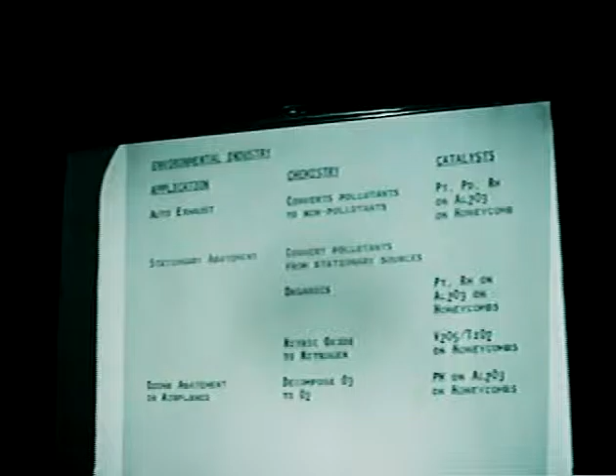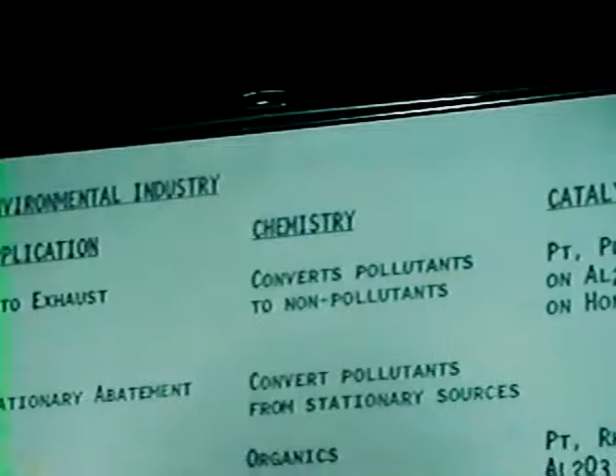And now, as was announced, we're very actively looking at the control of emissions from diesel engines. So what I'd like to do tonight is give you an overview of some of the existing technologies that are currently in practice for environmental control involving catalysts. As I mentioned, the auto exhaust is certainly the most predominant. We'll talk a little bit about the basic technology - basically it involves precious metal catalysts, and they're pretty much supported on honeycombs, these monolithic structures, which I'll show you some pictures of soon.

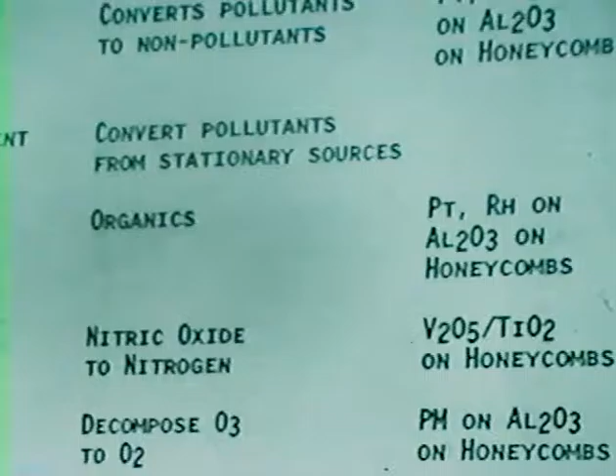One of the descendants of the automobile catalytic converter is the so-called stationary abatement. Here we're talking about catalytic devices that are used for controlling emissions from a variety of stationary sources - chemical plants, where they might be painting a particular car body in an automotive application, or coating wire, or a power plant where you have CO and hydrocarbon emissions, or, which is now becoming very critical, NOx emissions. NOx is one of the major pollutants that emanate from power plants, and therefore there's a lot of technology that's directed towards trying to make the catalytic abatement much more cost effective.

Platinum-based catalysts were used for the stationary organic oxidations, whereas for the reduction of the nitric oxides, effectively it's vanadium titanium, although some new catalysts are being introduced now - zeolite catalysts for higher temperature application. And then finally, there's another interesting one that we'll talk about briefly, ozone abatement in airplanes, related to the air that enters high-flying aircraft and how it needs to be purified. So these are some of the existing technologies, and then we'll get into talking about some of the things that are on the horizon, some new types of technology, all of which involve catalysis, all of which still have problems that need to be solved.

Let's talk briefly about the automobile catalytic converter. The normal combustion reactions that occur in the internal combustion engine are things like the combustion of benzene or branched hydrocarbons, and the complete combustion of these organic materials lead to, in addition to CO2 and water, energy - and that energy is the useful part that is used in the power stroke for the internal combustion engine.

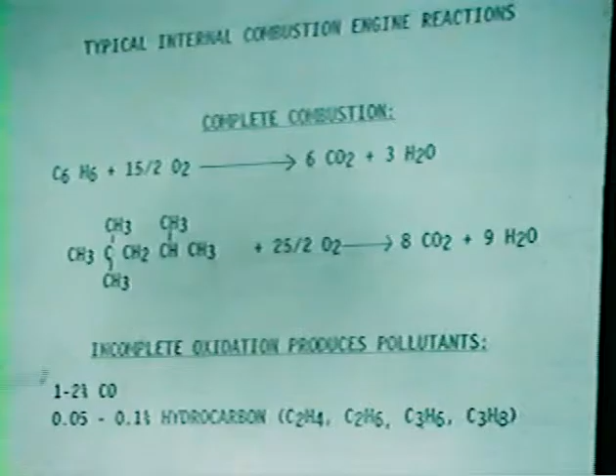These reactions, as they're written here, are shown to be complete. But in reality, due to mixing, due to lack of efficiency, etc., there are situations where the combustion process is less than efficient, and it results in significant quantities of things like carbon monoxide - anywhere from 1 to 2% of the emission is carbon monoxide.

Also, because of cracking reactions and other things that occur, you can get hydrocarbon concentrations up to about 0.1%, or about 1,000 ppm. And these are typically the hydrocarbons that are involved.

On the other hand, due to the high temperatures in the internal combustion engine, you get nitrogen fixation reactions where the nitrogen and oxygen react homogeneously and produce NOx. NOx is the symbol usually used for NO, NO2, N2O, and generally it's anywhere from about 100 to 300 parts per million of NOx in the emissions.

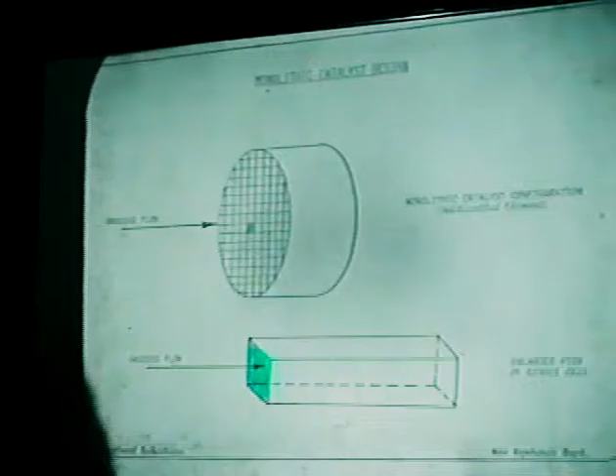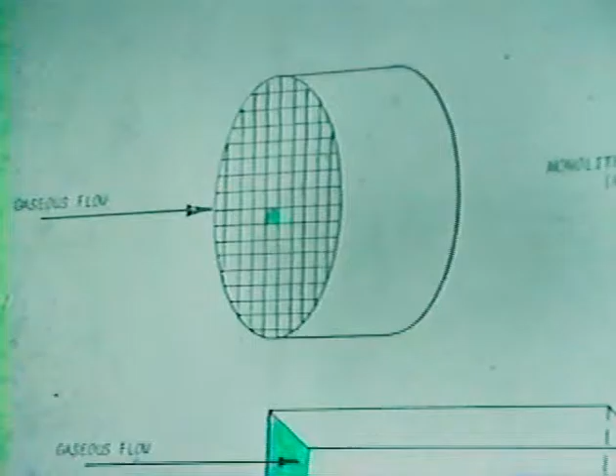The history is very interesting as to what technologies were ultimately used, and I don't have time to get into why General Motors went one way and Ford and Chrysler went another way, but basically most of the world right now is moving towards monolithic honeycomb structures that are effectively ceramic in nature, although there are some metal substrates that are now becoming of interest.

But these materials have a variety of cells, and usually 400 cells per square inch is typically what is used in current automobile catalysts. The ceramic material is simply used as a support or structure upon which the catalyst coating is deposited on the walls of the channel. The pollutants emanate from the internal combustion engine, pass through the honeycomb, interact with the catalysts, and the catalysis reactions occur.

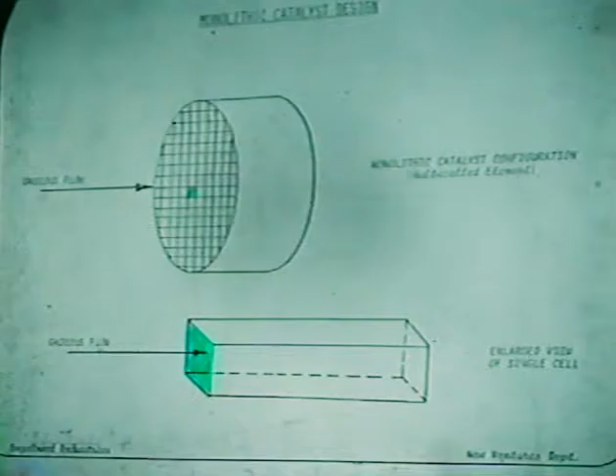The honeycomb or monolithic structure is particularly popular because it has very low pressure drop. It has about a 70% open frontal area, which means very low back pressure, which translates to a low fuel penalty. Also, because you can pack a lot of cells per square inch into this device, you can have a very high surface area with relatively small volume, so from a real estate point of view it fits in nicely underneath the automobile.

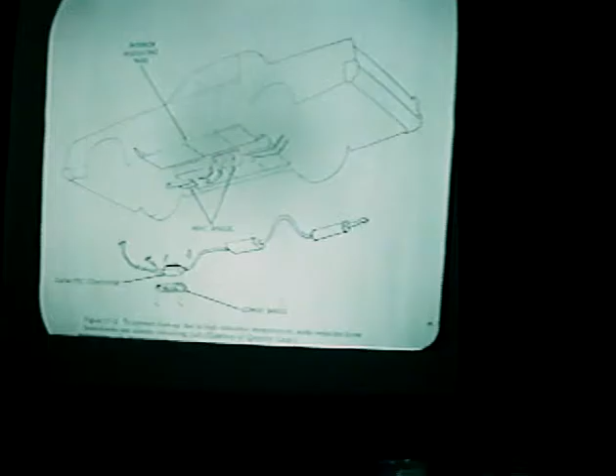Now that, if we take any one channel of that—oh, by the way, let me show you where the catalytic converter fits into the automobile in case you don't know already. In this particular shot we have it before the muffler, but the catalytic converter is right underneath, usually the passenger seat. The gases are connected to the engine manifold, and the gases pass through.

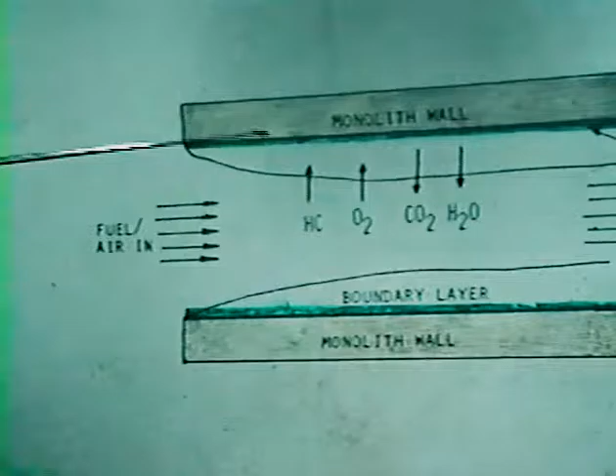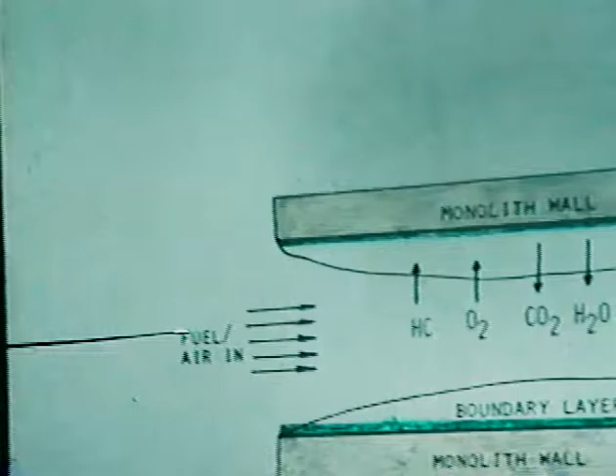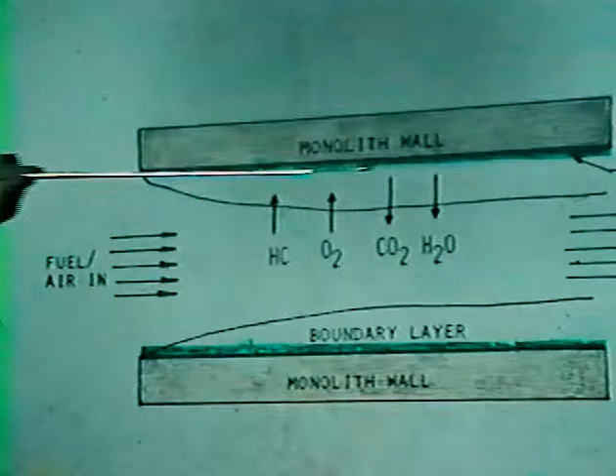This is a single channel of a honeycomb, and the catalyst coating is deposited onto the walls of this monolithic material. The catalyst is deposited on the wall, and the pollutants, fuel or air, etc., pass through this channel, of which there are at least 400 per square inch, as I indicated earlier. These pollutants diffuse through this stagnant layer into the catalyst coating, get combusted to CO2 and water, and then exit the actual tailpipe.

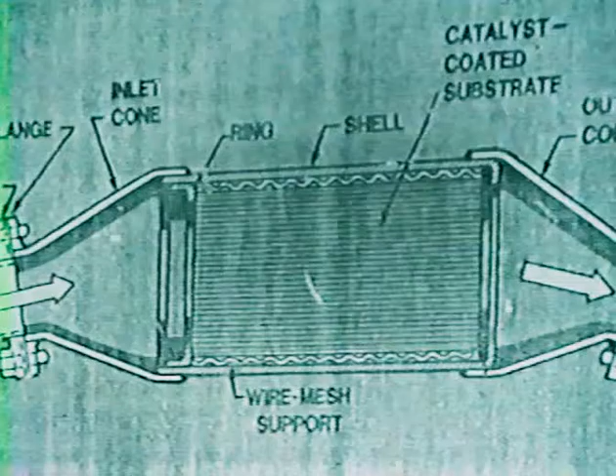The monolithic converter is mounted or packaged in the exhaust manifold. As you can see, you have to have the right angles in order to present uniformly to the face of the honeycomb the pollutants and air mixture. The material here is used for both insulation as well as for shock, because the material very often will bounce over highways and roads, and to keep it from fracturing you have to have the proper type of insulation. If it's not canned properly, these things can break very easily.

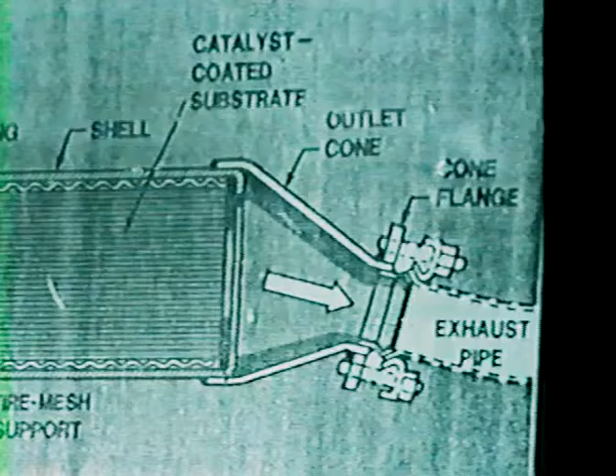As I'll mention later on, the newest automobile catalytic converters have another device right here at the inlet to the honeycomb, called an oxygen sensor, which is used to control the air-to-fuel ratio.

Okay, let's talk about the catalysis a little bit. In 1976, when the first catalytic converters were actually installed in the United States, the only pollutants that needed to be treated, which couldn't be handled through engine modification, were CO and hydrocarbons. The CO undergoes an oxidation reaction to CO2, and the hydrocarbons to CO2 and water.

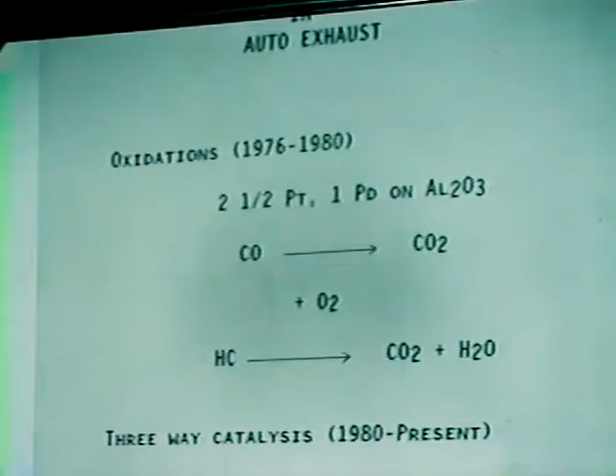The catalyst used for that is roughly 2.5 platinum to 1 palladium, usually on some type of stabilized alumina material. Now that was fine until about 1980, because up until this point the NOx standards were not so critical that they couldn't be met by engine modification. EGR, exhaust gas recirculation, was the common method used.

But in 1980, the so-called three-way catalysis became popular, and there you have to oxidize CO and hydrocarbons just like before, but also reduce the NOx. So you've got the problem of needing an oxidizing environment for 2 of the pollutants and a reducing environment for the third, the NOx, to make nitrogen. I'll explain how the oxygen sensor fits into providing the proper air-to-fuel ratio sufficient to get all 3 of these.

The catalyst currently used in almost all automobiles sold in the US, as well as in Japan and soon in Europe, is a 5-to-1 ratio of platinum to rhodium on alumina. The alumina usually contains other things, stabilizers, so-called oxygen storage components, things like cerium oxide, nickel oxide. So the technology is much more complicated than one would imagine from looking at it here. But basically the reactions: CO and the hydrocarbons and hydrogen are oxidized, the NOx is reduced, sometimes by the CO and the hydrocarbon.

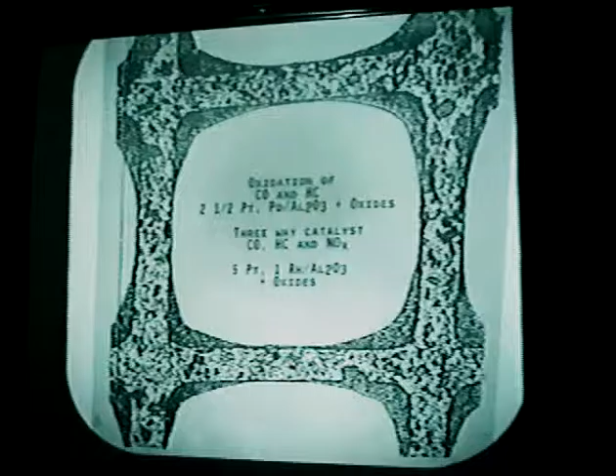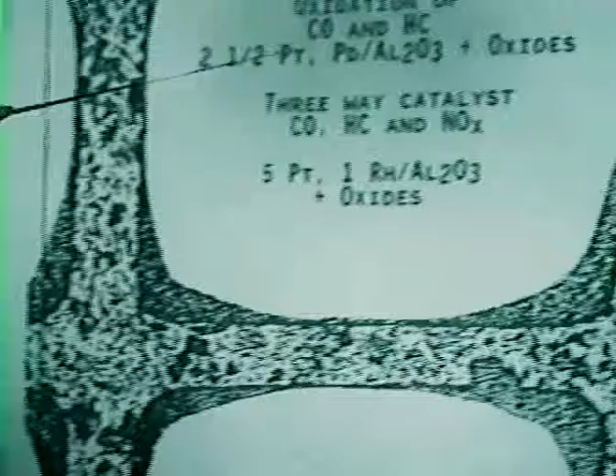Taking a closer look at that catalyst deposited on the ceramic material, this is a ceramic material called cordierite, a magnesium aluminosilicate material. It's got very high temperature stability characteristics. It also has very low thermal expansion, so consequently it is very resistant to thermal shock, which causes cracking.

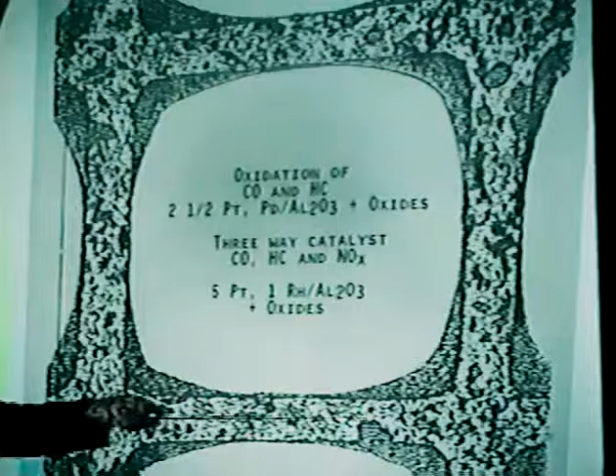The catalyst coating, which is effectively alumina - in the case of oxidation, it's platinum palladium, and the three-way catalyst is platinum and rhodium - the catalytic metals are deposited on the alumina, or within the alumina wash coat. That's what we call this. And as you can see, it is deposited on the ceramic material, bonded basically physically as well as chemically.

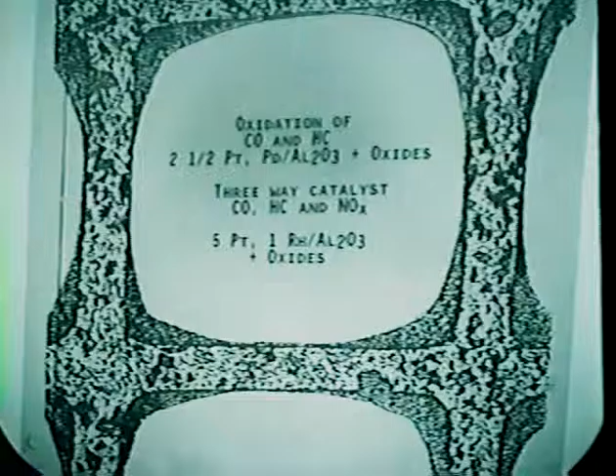There are pores, and you can see some what appear to be holes in the ceramic wall, and they serve as mounting points for the physical bonding of the wash coat to that ceramic material. And obviously you're talking about relatively high linear velocities in the auto exhaust, so you have to have good adherent coatings to that ceramic.

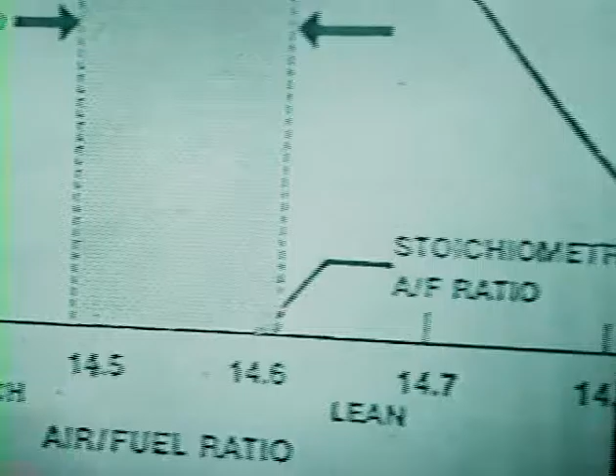I mentioned that the current technology, the three-way catalysis, takes advantage of a very important development that occurred in the late 70s, the so-called oxygen sensor. And the oxygen sensor allows you to do all 3 catalytic reactions, the oxidations as well as the reductions, and it works as follows.

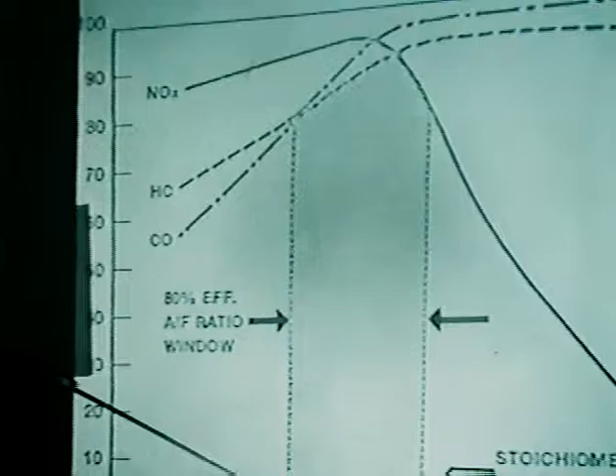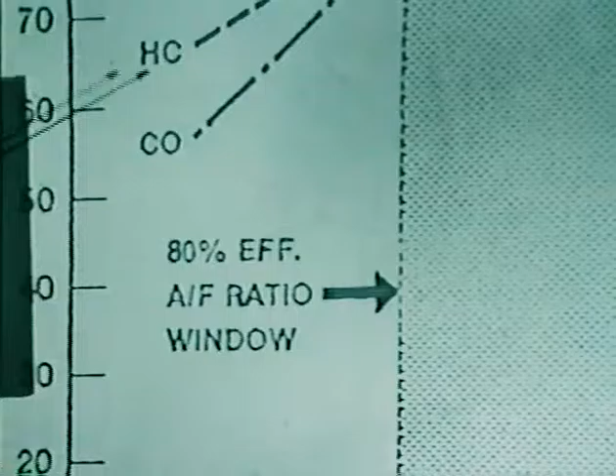If this is conversion, and this is the air-to-fuel ratio which the carburetor is functioning, you can see that when you are very rich of stoichiometric, indicating that you have more fuel than air, you're rich in the sense that you don't have enough oxygen to combust all of the fuel. In that case, the abatement of CO and hydrocarbon is going to be relatively low. As you move towards the stoichiometric point, where you have a lot more oxygen present, you can begin to oxidize the CO and the hydrocarbons, and you can see that there's a point where you get very high conversion of CO and hydrocarbon, particularly as you go further into the lean regime where you have an excess of air.

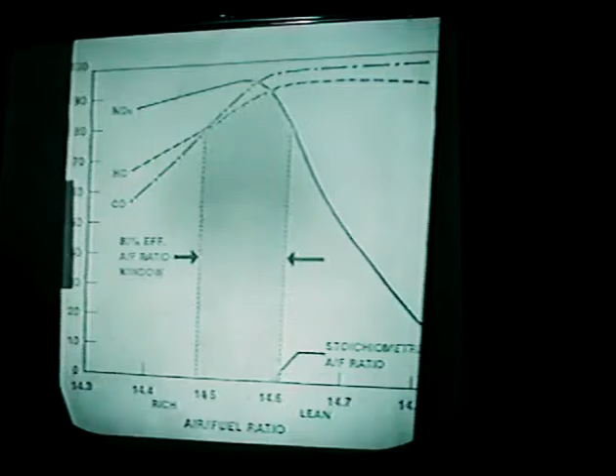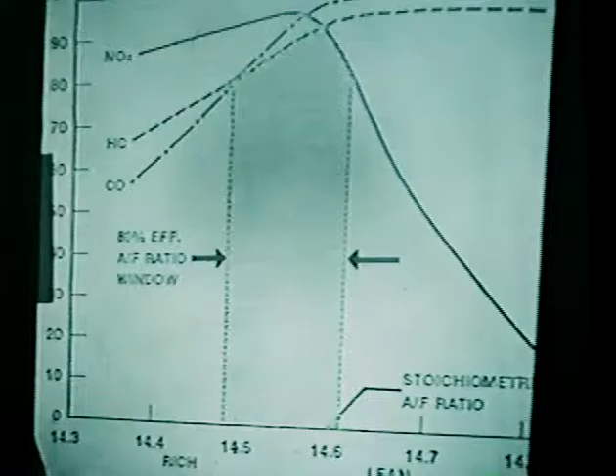On the other hand, the NOx, which requires a reducing environment, its conversion is very high at the rich condition, because obviously you have extra fuel that can reduce the NOx, and that conversion stays high until you get to this air-to-fuel ratio where you start going lean, and then the NOx conversion drops. So effectively there is a very narrow window of air-to-fuel ratio where you can get effectively 80 to 90% conversion of the 3 pollutants simultaneously.

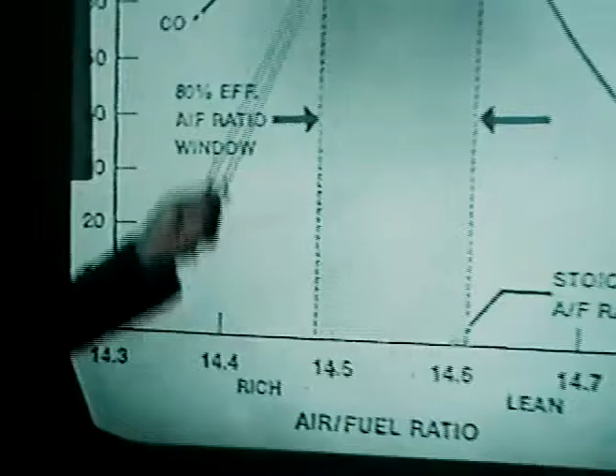And that's why the term three-way catalysis is used for these. The oxygen sensor is the device, as I mentioned before, that is at the inlet to the catalyst face. It senses the oxygen, feeds back to the carburetor, and continuously adjusts the air-to-fuel ratio so that it's constantly perturbed between these 2 regimes so that you get all 3 conversions to occur simultaneously.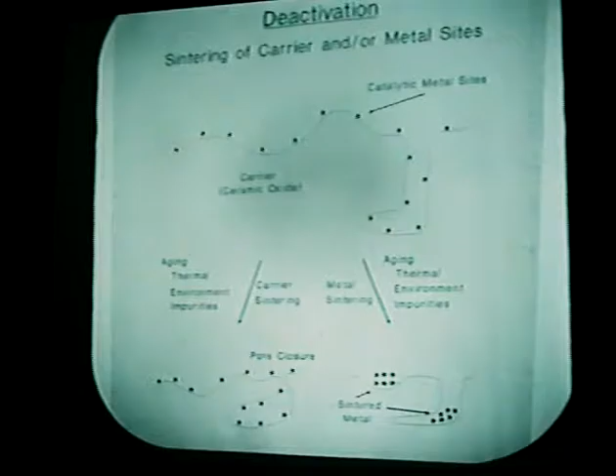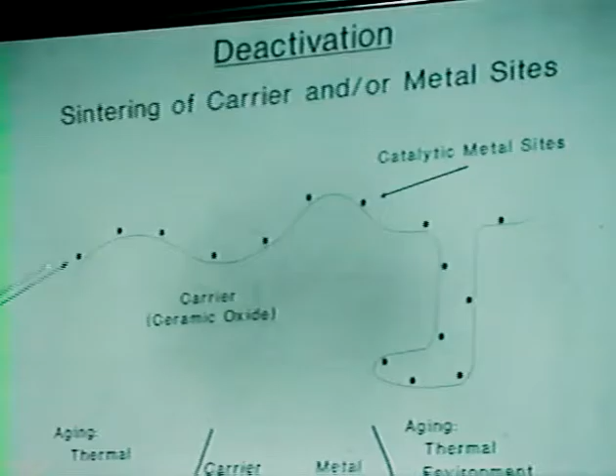So that's effectively what the existing technology is in the automobile. I'll just briefly mention the fact that these catalysts do deactivate. They are federally required to go 50,000 miles, and that's soon going to change to 100,000 miles.

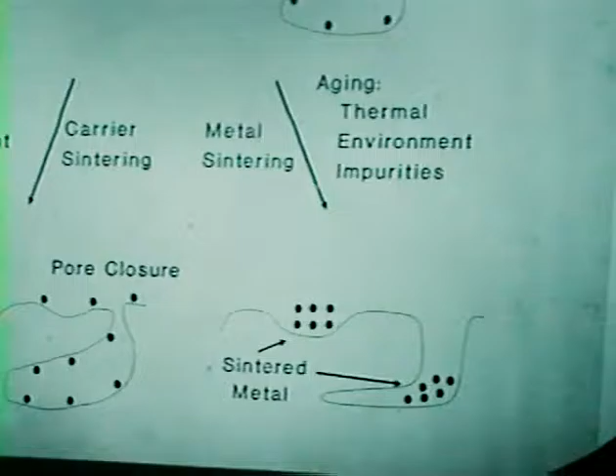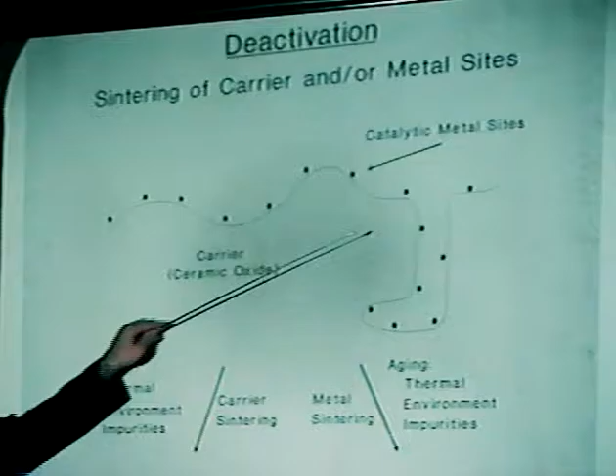But basically, if you think of this as a model for a catalyst carrier, this is alumina, and these spots represent platinum, palladium, or rhodium atoms, or clusters, or crystallites. The reactants must interact with these metals in order to undergo catalysis. Now you've got a pore, and most of the catalyst wash coat material is very porous, so consequently these reactants have to be transported into the porous network in order to interact with the catalytic sites and get converted. That's fine until you start going to very high thermal stresses on the catalyst.

These thermal stresses can have a major impact on the structure of this carrier material. This carrier material can undergo sintering, and you probably are all familiar with that from your own work in petroleum or chemical areas. This sintering phenomenon is much more pronounced in the auto exhaust, mainly because the temperatures are quite high. In the automobile, you can get temperatures close to 1,000 degrees centigrade, depending on how the car is being driven.

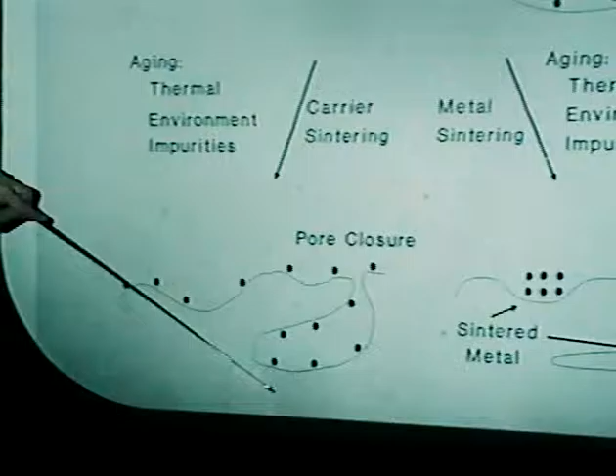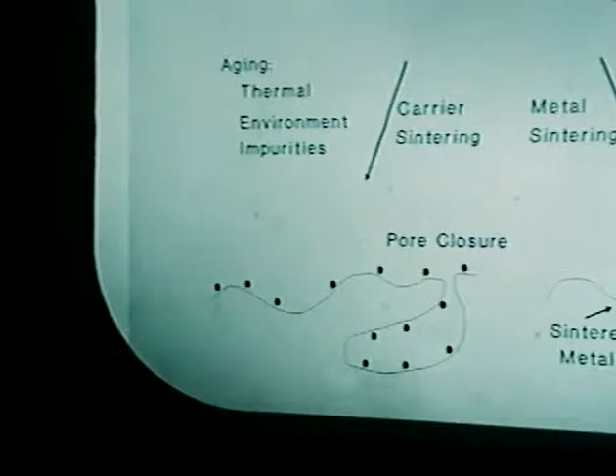So consequently, getting alumina materials to be stable to temperatures as high as 1,000 degrees, at least for periodic increases in temperature to that point, was a major challenge. And if you don't do that, what happens is you get this sintering, which is effectively a bottlenecking, and you choke out these active sites, so the reactants can't arrive at those sites.

And that is generally stimulated by thermal effects, but certain environmental impurities can also have an effect. Things like sodium and chlorine, etc., can have an impact on the sintering rates.

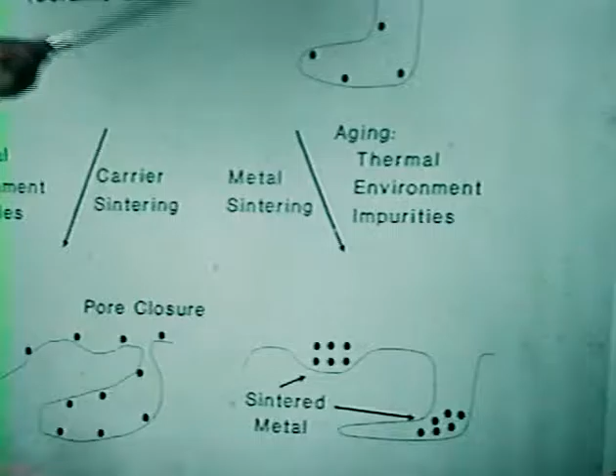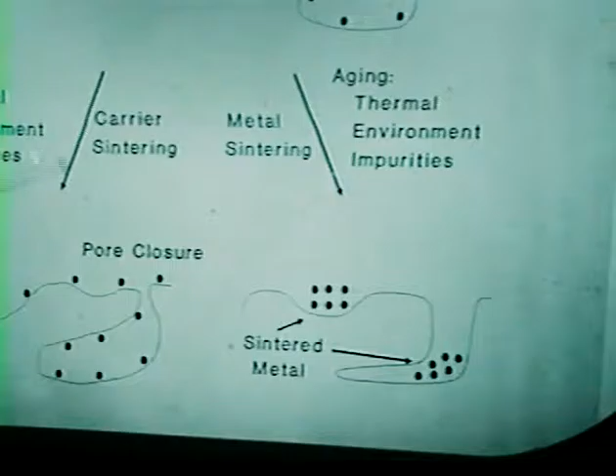Similarly, the metal can undergo a different type of mechanism, agglomeration or Ostwald ripening, if you may, where these small crystallites have a very high surface-to-volume free energy. Consequently, there is a propensity for them to grow into large crystallites, and when that happens, only the crystallites on the surface are available to the reactants. The crystallites of platinum or rhodium that are underneath are no longer available, and consequently you've gone through this metal sintering phenomena, which results in a decrease in the overall activity.

So basically the catalysts had to be developed to be able to resist periodic increases in temperature up to about 1,000 degrees. And this is still a major problem that exists, but obviously the enhanced control in automobiles is minimizing the thermal stresses on the catalyst.

But one that doesn't seem to want to go away is selective poisoning. And just as in the chemical and petroleum industry, there are poisons that influence the automobile catalyst, the most notable of which was lead, which was removed in general from gasolines in 1975-1976, although there's anywhere from about 3 to 5 milligrams per gallon of lead in unleaded gasoline.

So that lead represents a potential poison where it selectively reacts just with the catalytic metals, in this case the platinum, palladium, or rhodium. It alloys, it deactivates the catalyst by forming some new type of compound. So that's the reason why lead came out of the gasoline initially, and lead is going to be further reduced in unleaded gasoline to levels below 1 milligram, so that'll increase the overall life of the catalyst.

But other things, mercury, arsenic, etc., gaseous poisons, SO2 - sulfur is present in gasoline. It is a product of the combustion reaction, as is SO3. And both of these, SO2 and SO3, can adsorb onto the metal sites.

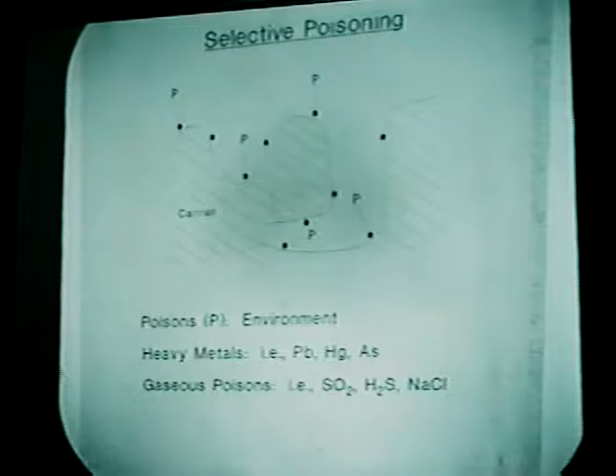Usually, if it adsorbs onto the metal, it's more of a reversible poison, where if you get a high temperature spike, SO2 or SO3 will desorb from the surface, unless you get SO3 that reacts with the alumina, in which case you form aluminum sulfate.

And sodium chloride generally is a problem, particularly near oceans, where the air may contain various amounts of sodium chloride. H2S has become a problem now as a result of the three-way catalyst, where under certain conditions you are in a reducing environment.

And in that case, SO2 that's adsorbed on the catalyst can get converted to H2S. Some of you may have smelled that in your automobiles. And there's a lot of interest right now in trying to learn how to control the H2S emissions from the automobile catalytic converter.

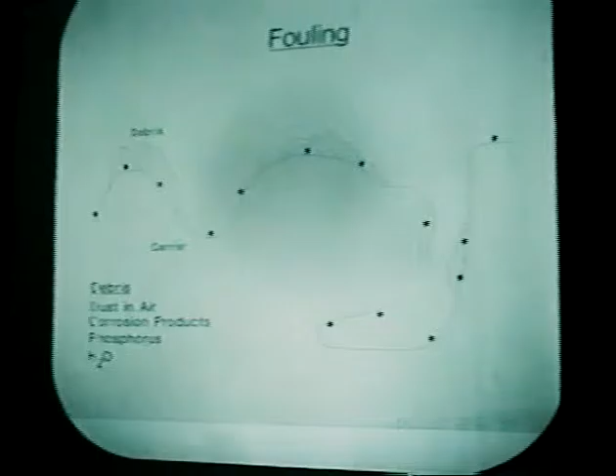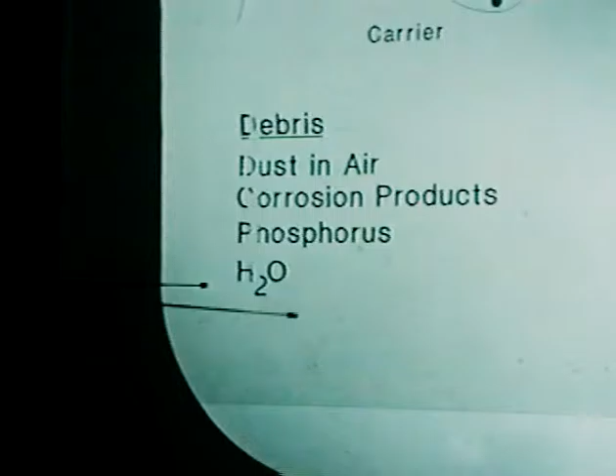Just as in the petroleum industry, where you've got coke formation, you can get fouling on the catalyst, which is effectively debris that deposits indiscriminately onto the catalyst or within the catalyst pores. And usually phosphorus resulting from the lubricating oils is one of the major sources of that.

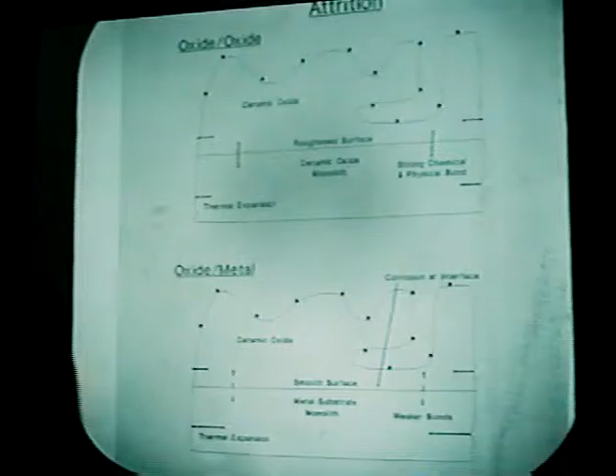And that phosphorus tends to deposit on the catalyst, but primarily it builds up in the arteries, if you may, of the catalyst, and tends to enhance pore diffusion resistance, and as a result you've got a greater resistance to pore diffusion, and that ends up decreasing the overall rate of reaction. And again, the possible use of non-phosphorus oils is something that's on the horizon.

You've got to get this coating to stay adherent to the monolithic substrate. And again, here's our model of our alumina coating with the precious metal on it. It is bound both chemically and physically to a ceramic oxide, so you've got strong chemical bonding.

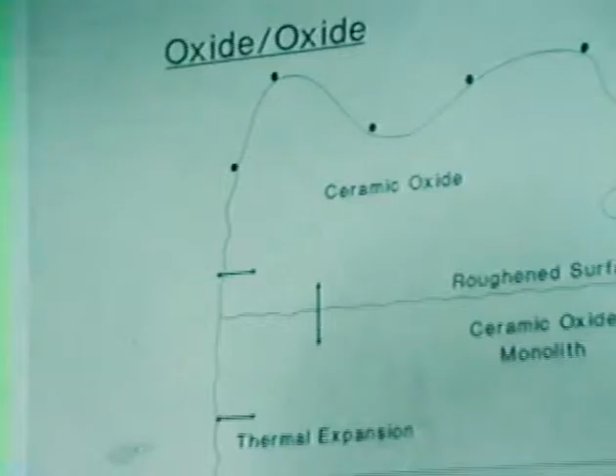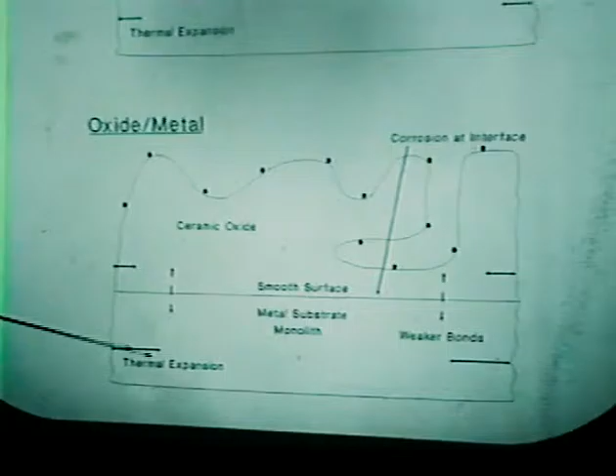The materials had to be developed to be compatible with regard to thermal expansion, because the car catalyst will see various differences in temperature, and as a result, if there's too big a difference in the thermal expansion, as indicated by this line, you can get a ripping or an attrition, what we call exfoliation, of the wash coat from the ceramic.

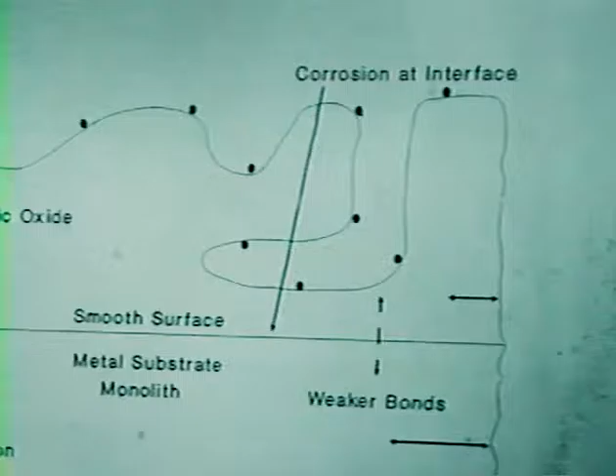That's a very serious problem with metal substrates, because obviously metals have a very high thermal expansion relative to a ceramic, and therefore the technology to bond the coating, the oxide, to the metal has to be very, very unique in order to get good adherent coatings.

That's basically what I wanted to say about auto exhaust. As I mentioned earlier, the automobile catalytic converter was really the parent of many technologies, and one of the technologies that developed from that was stationary pollution abatement, particularly of organic materials.

Some of these are shown here, a plot of conversion versus temperature. You can see the different ranges over which these different materials undergo catalytic oxidation. Catalytic processes are now generally favorable compared to incineration, because you can operate at lower temperatures due to the nature of the catalyst.

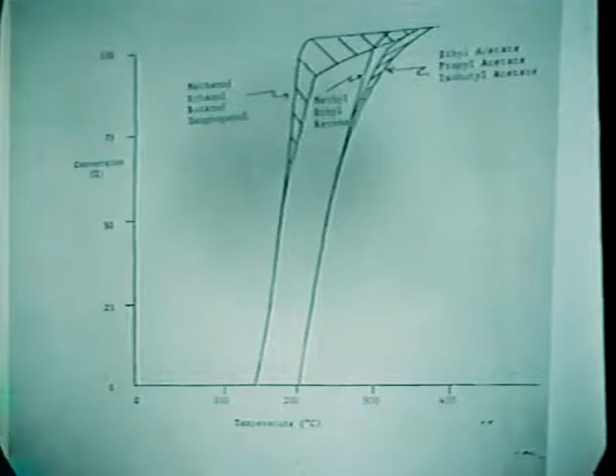You don't have to use expensive materials of construction, and your fuel costs are much lower because you don't have to add additional fuel as you would in a thermal incinerator. Naturally, you don't produce the high temperatures that result in NOx. So stationary abatement in chemical plants, painting operations, even bakeries is becoming an approach of choice.

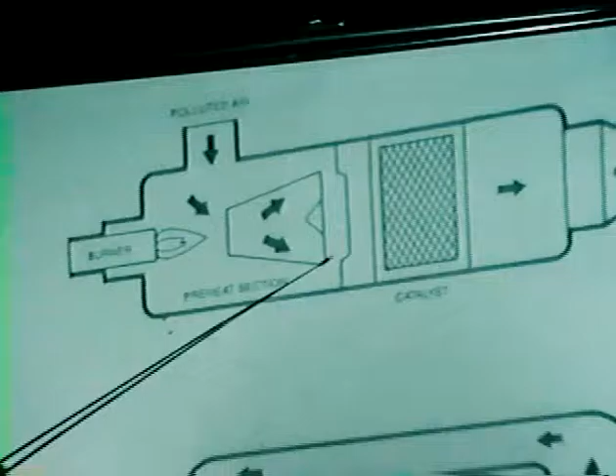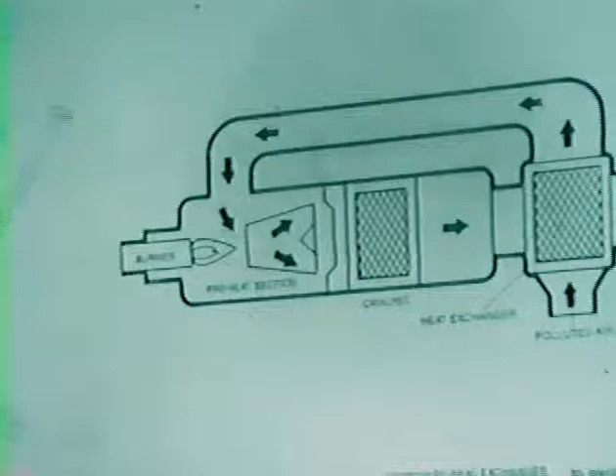Just to give you an idea of what the design basically looks like: you have the pollutant gases coming in, some kind of distributor, and a burner to get your preheat temperature up high enough. Those gases are then properly mixed and passed through the honeycomb, hopefully uniformly, and combusted.

They then go to the effluent. If you've got a high concentration of pollutants where you get high exotherms, you can use that heat exchange to preheat the gas and put less demand on the burner. If you continue further, you can have a secondary heat exchanger to even heat process air. It depends on how dirty the feedstock is.

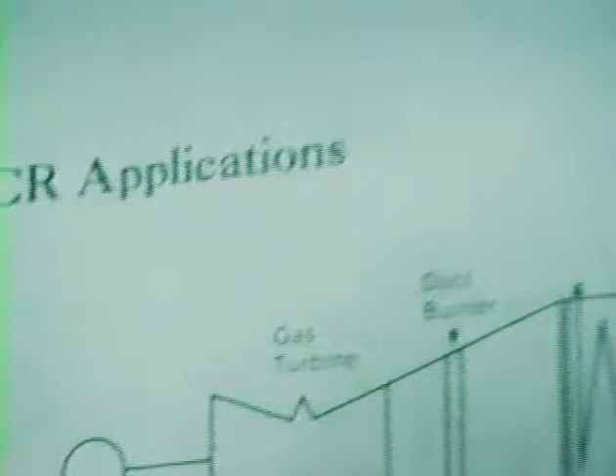A technology in stationary abatement getting a lot of play, particularly here in the United States now, is called SCR, Selective Catalytic Reduction. Here we are trying to selectively reduce nitric oxides, NO, that emanate from the power plant.

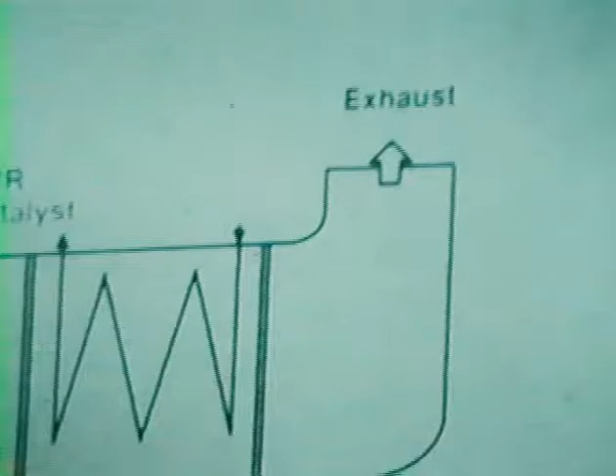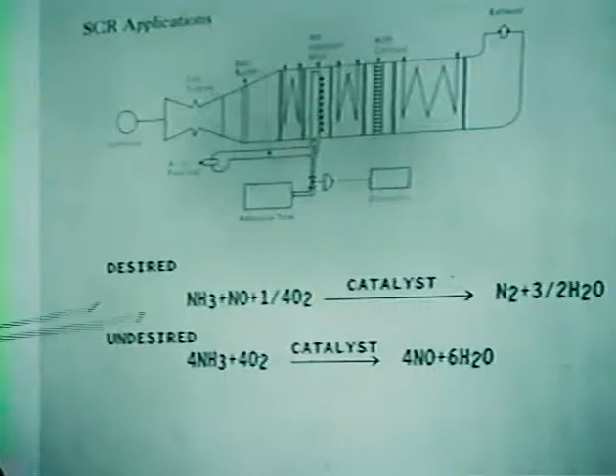Power plants are burning fuels at temperatures well in excess of 2,000 degrees — points within the flame or combustion can exceed 2,000 degrees — and consequently you can get fairly high concentrations of NO, maybe 150 to 300 parts per million. That NO is now regulated and has to be removed.

The technology getting the most play right now is SCR, where you inject ammonia through a manifold system. It passes through the catalyst, which turns out to be vanadium on titanium — that's the primary catalyst used now.

That reaction is very selective in that the ammonia, instead of reacting with oxygen to make NO, actually selectively reduces the NO. So instead of the undesirable reaction that makes NO, this catalyst is selective enough that you can reduce it all the way down to nitrogen. We'll say a little more about this later on.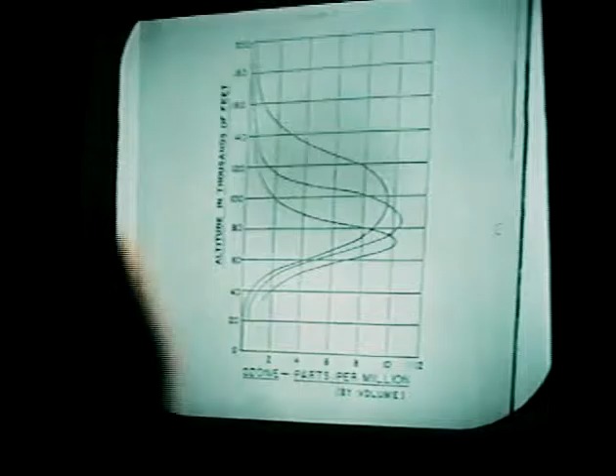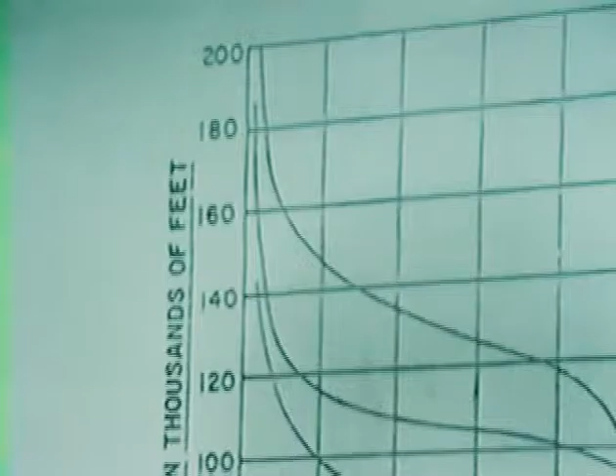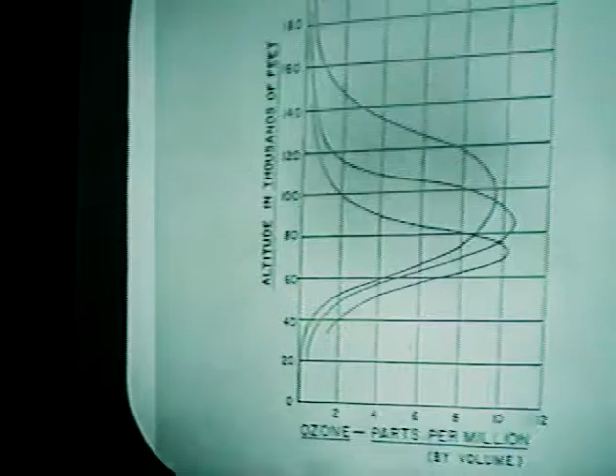One very interesting application for catalysis that very few people know about is ozone abatement. We hear a lot about atmospheric ozone, ozone in the stratosphere and troposphere. It turns out that if you make a plot of altitude versus ozone concentration, you can see the ozone starts building up, and it depends on location, etc.

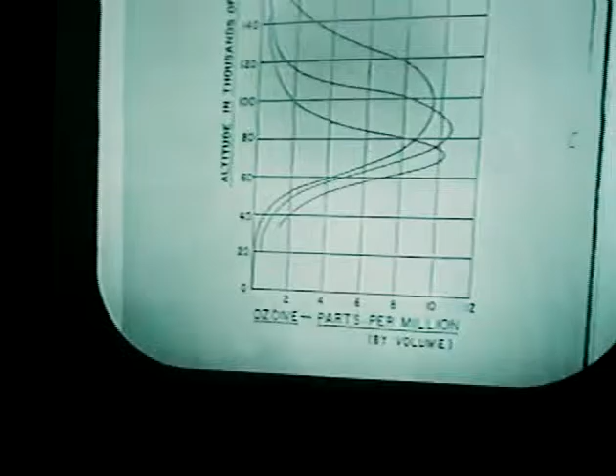Ozone concentrations are usually highest in the polar regions, the North and South Pole, although I guess it's getting depleted. But in any event, there are significant concentrations of ozone. Now, when commercial airlines fly to Europe or Asia, they fly over the polar regions, typically between 40 and 60,000 feet.

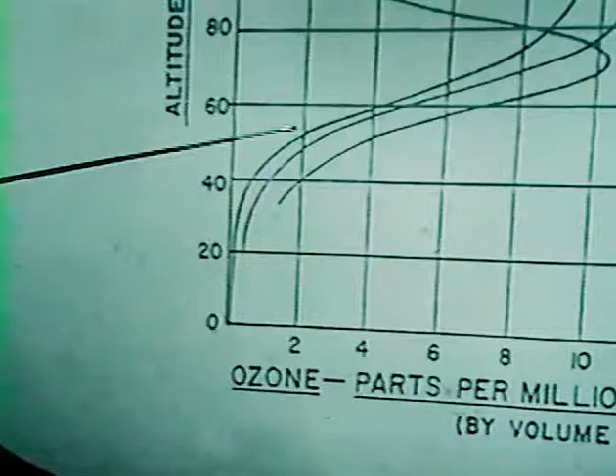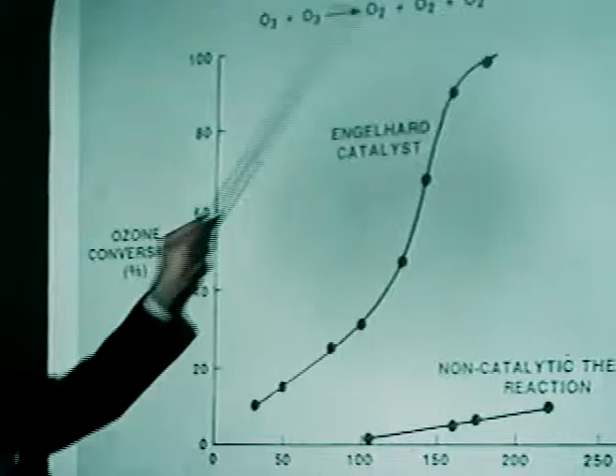When they're bringing in air from the outside, that air has some ozone in it, and that ozone will make passengers and crew airsick. So there is technology developed to catalytically abate the ozone before it enters the airplane. That technology is present in all the 747s, mostly all the wide-body airplanes, and some of the newer ones, even the 777 that Boeing is developing.

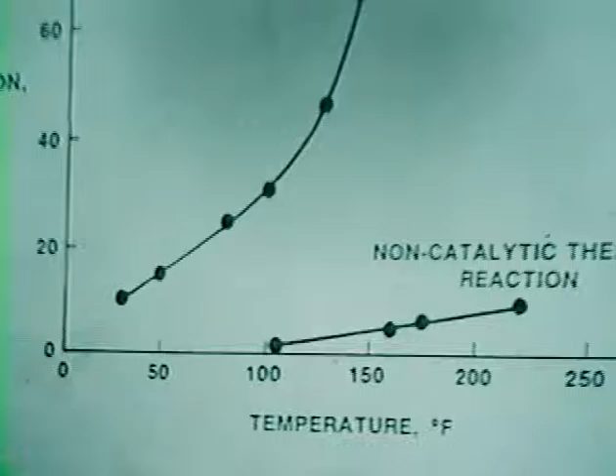The advantage the catalyst has is to take the ozone and simply decompose it to oxygen. This has to be done at a relatively low temperature because you want to be able to use the discharge temperature from the compressor. When bringing the air in from outside, you've got to compress it — it's very cold.

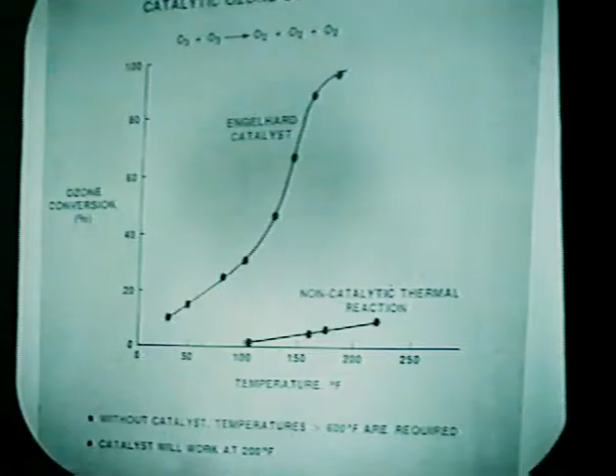So to compress that, you bring it up to about, in degrees Fahrenheit, anywhere from 250 to 300 degrees. That's a typical compressor discharge temperature on a major wide-body airline. Catalysts actually do function at that temperature — the right catalyst does function — whereas a thermal process would require much higher temperatures to get the required reductions. So this is a very neat application for catalysts in commercial airlines.

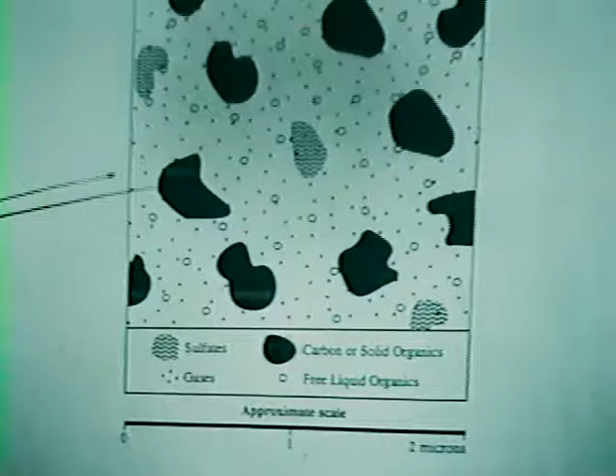Okay, in the introduction we mentioned diesel. This is a schematic of what the exhaust of a diesel engine might look like, a cartoon at least. Anybody that's driven behind a bus or truck knows you don't see quite this, what you see are these things. These are the dry soot particles that we often see.

In addition to the dry soot particles, as indicated by this key, you also have free liquids represented by these open circles. These liquids are usually lubricating oils that have not been burned, and they add to the particulate load of the emission from the diesel engine.

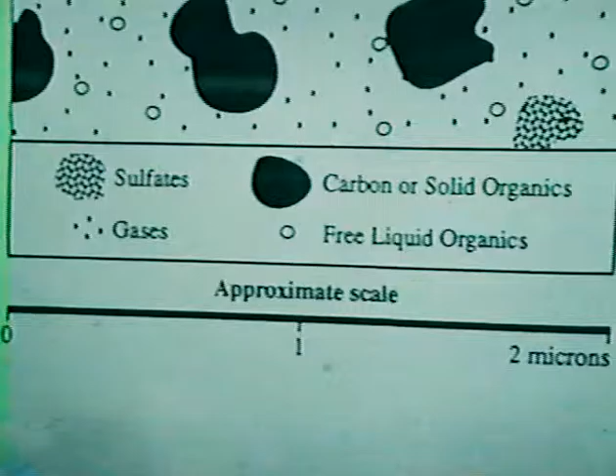So these things may be gases when they first come out of the engine, but as they cool going down the manifold, they start to condense. So in addition to the liquids and solids, you also have gases indicated by the dots, and these gases are things like CO, hydrocarbons, and sulfur dioxide, because sulfur is present in diesel fuel.

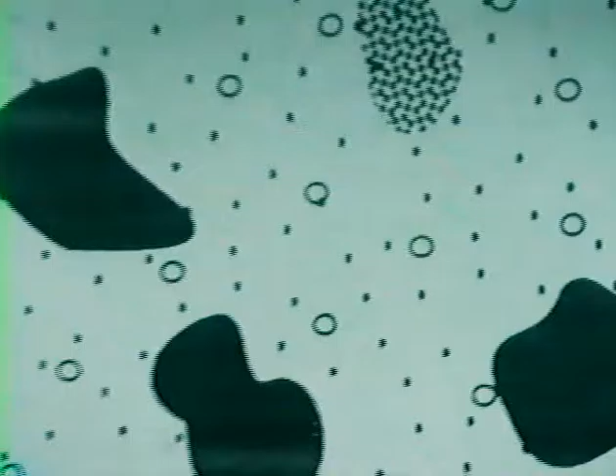You've got anywhere from about 2,000 to 3,000 parts per million currently in diesel fuel. As a result of the combustion process, some of that SO2 gets converted to SO3. As that SO3 is being cooled, it becomes somewhat of an aerosol, and you've got sulfuric acid particles coming out. So consequently, the emission from the diesel engine is a three-phase exhaust.

And how is a catalyst going to be able to function in this kind of environment? If you think about the automobile catalyst, which we thought was a tough job, there you're only dealing with gases. Here you're dealing with all of these different types of structures.

In 1994, there will be federal regulations requiring that particulate emissions from diesel engines be reduced below a certain value. The primary source at which the catalyst can function is to primarily eliminate the liquids and some of the gases and not produce any sulfate. Because if you think about it, a catalyst that oxidizes CO and hydrocarbon, or these liquids, is probably going to oxidize SO2 to SO3.

If you recall, platinum catalyst used to be the catalyst used for production of sulfuric acid, and they do seem to be the metals of choice for diesel emissions. So the trick is to be able to combust and oxidize the CO, hydrocarbons, and liquids, but without oxidizing SO2 to make SO3. Because if you make SO3 in the catalyst, you're making these particles that add to the particulate load. So there's a real problem in developing selective catalysts that simply oxidize the organics and not the SO2.